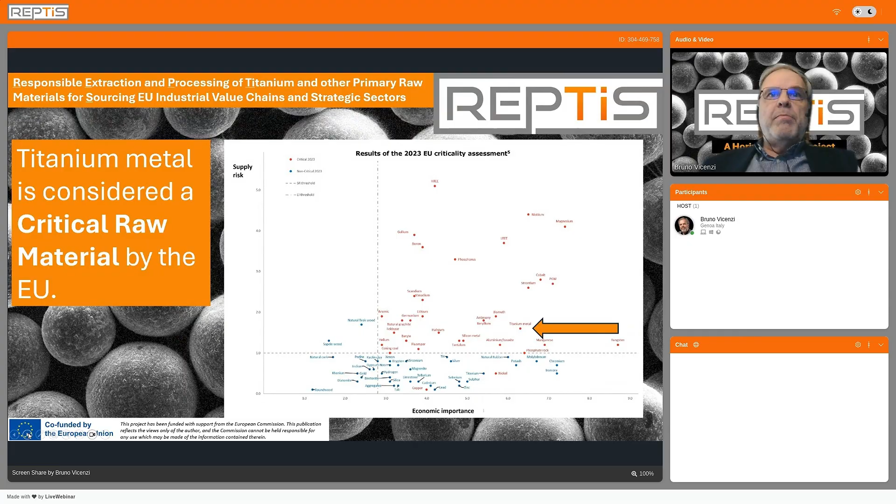And so it is really important for the European Union because there are a lot of products made of titanium that are being produced in Europe. On the other hand, Europe is not a real producer of the raw materials. Practically all of the titanium which is used in the EU, in aerospace, in industrial applications, in defense, which we know is on the growth side now, and medical, is all imported, basically.

There is hardly any usage of ore from European land, due to several reasons. And even when we receive it, we are not actually receiving it as an ore, but already in the sponge state.

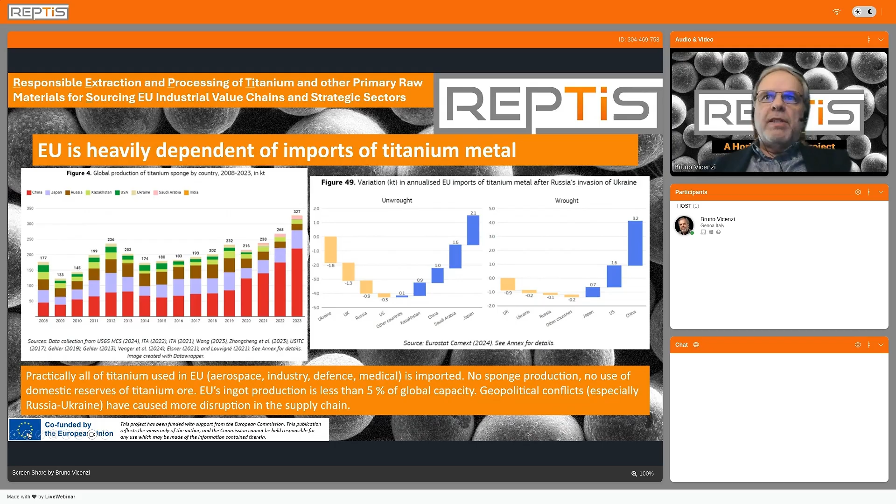So imports from other countries like Kazakhstan, China, Saudi Arabia, and Japan especially, Japan and China in the different situations, have increased, and also the US. So the supply chain for Europe is a bit critical, and this doesn't surprise us. This is, let's say, the y-axis in the critical raw materials chart that we saw in the previous slide. So it's even got worse, as we said.

So the idea was to try to overcome this, and the EU had already started a strategic partnership with Ukraine for many reasons, but also because it's a very important partner in terms of availability of critical raw materials. And so the idea was to respond to the call of the Horizon Europe framework to establish a supply chain from one of these strategic partner countries. The other possibility was Canada. We chose to follow the Ukrainian track and set up a consortium to try to establish a sustainable and energy efficient solution for extraction, processing, and finally sourcing of titanium into the EU.

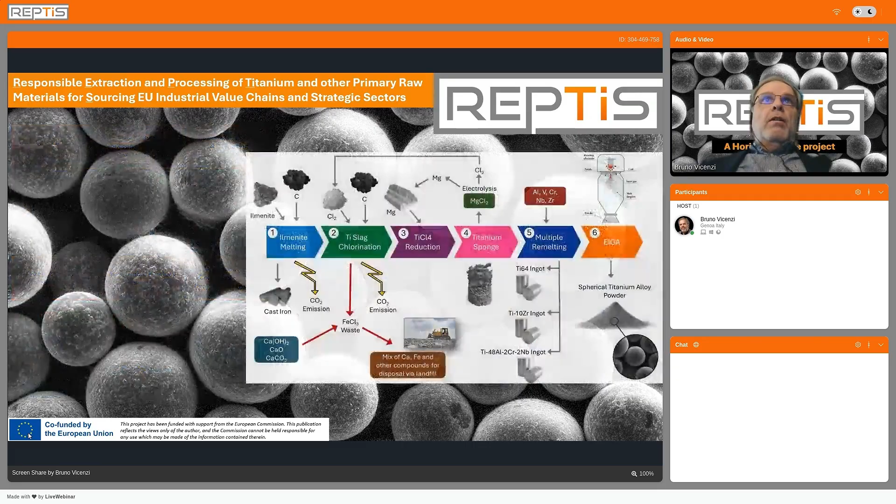So what is the situation at the moment when we're talking about production of titanium powders? And this is a starting point, which is showing many weak points. I mean, there are very established processes. There are also other processes established, and some of these will be shown later in the other lectures.

But in particular, we are talking about the so-called Kroll process that starts from the mineral, and here we have the ilmenite. So there is a melting process. There is a chlorination to separate the titanium, and then this titanium chloride is reduced into a titanium sponge. This is done by reaction with magnesium, so that the chloride is then recycled in the process.

But after that, you have to remelt this sponge of titanium several times to obtain the right composition. Also, you have to add the various alloying elements if you want to produce the different titanium alloys. And then to produce the powders, you have to go through an atomization. And as titanium is very reactive, this is normally done in a process called EIGA, which is electrode induction gas atomization. And this brings finally the spherical titanium alloy powders.

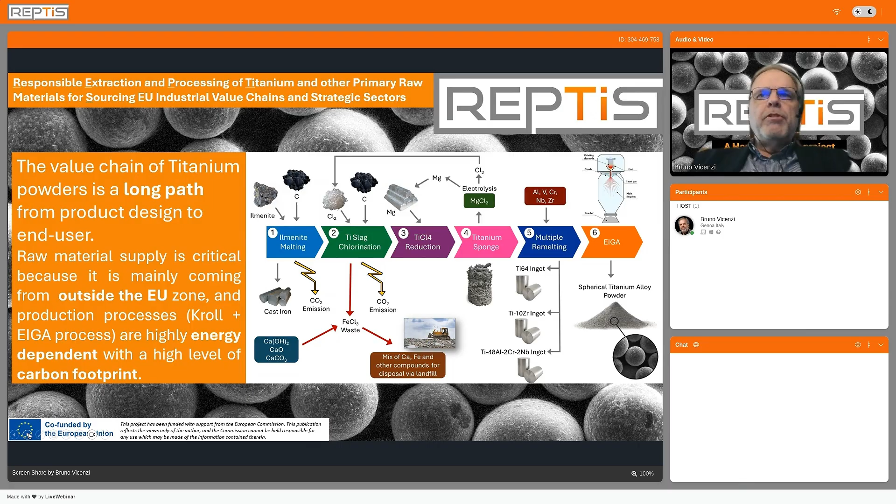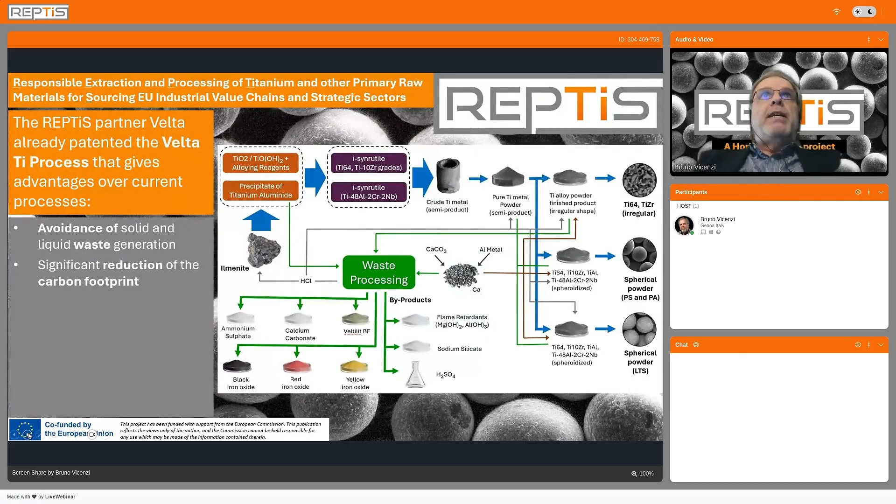And the good starting point for the project was that Velta already developed a process called the Velta titanium process that already has a lot of advantages that you can see on the left, and we will comment. So if you start from the left, from ilmenite, just by chemical processing you can have the separation of the titanium fraction, which is the synthetic rutile, which can then be reduced with similar processes to those used in the Kroll process, also by usage of other stripping metals like magnesium and calcium. And you finally get to the crude titanium metal, the equivalent of a sponge. But this is then just crushed into an irregular powder.

Please note that while processing the titanium ores, they can already be additivated with the other alloying elements, and this leads to the direct formation of the alloy sponge, which is then crushed into the titanium alloy powder directly without having to alloy in the melt. So as you can see, it's already a low temperature process compared to the several meltings in the Kroll process.

And on the other hand, Velta already developed all the valorization of the side streams. So all the waste, which is everything which is not titanium, is either recycled, like for instance the hydrochloric acid, which is reused in the process, or used as other products for several applications. You can see there's pigments, flame retardants, materials that go into construction materials, and also fertilizers, for instance. So actually, it's a zero waste process.

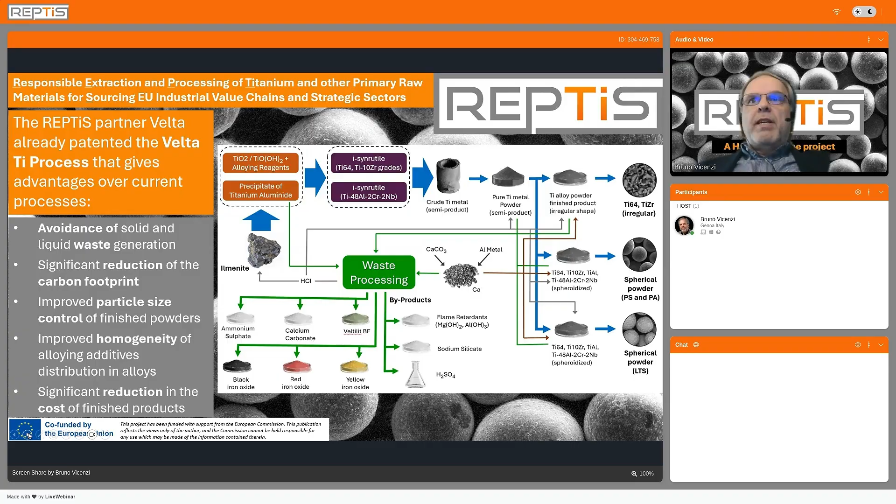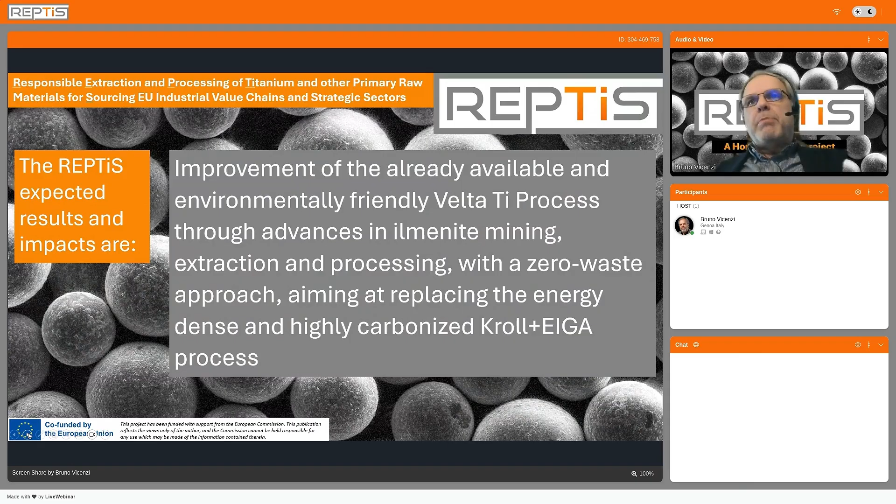Yes, because clearly we need to go from what we already have, which is already available at, let's say, lab scale, at kilogram scale, to a higher amount and achieve TRL 6 or 7 at the end of the project. And we want to demonstrate that this improved process will be able to replace, at least partially, the Kroll-EIGA process.

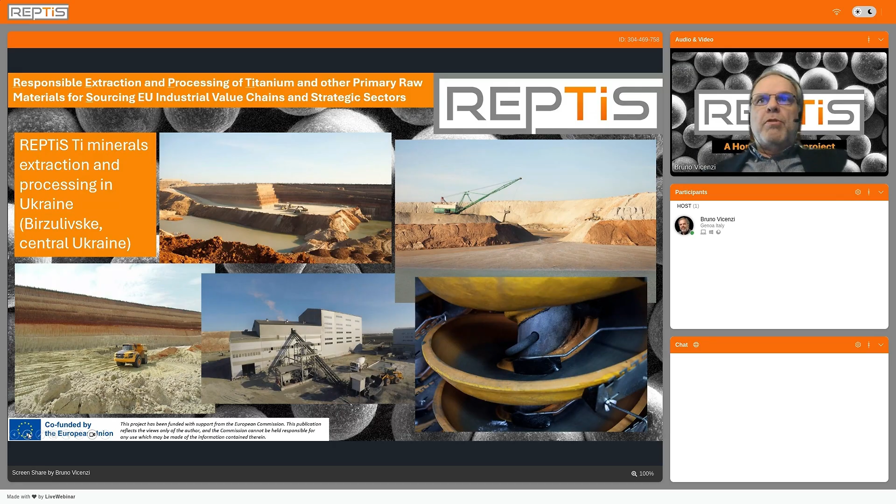And well, all starts from Ukraine, and here you can see some images from Birzulivske. You can see the sands there that are being exploited, and then some of the processing that can be done on site. And then also in Ukraine, there's the facilities that will process the ore into the actual metal powders as shown in the previous chart.

So we plan to build this supply chain from Ukraine, and this will likely be one of the good sources for titanium to be used in powder metallurgy products in Europe with this net zero waste approach and with the sustainable production, and so that producers will be able to claim lower end values of their sustainability indexes by using a more sustainable feedstock.

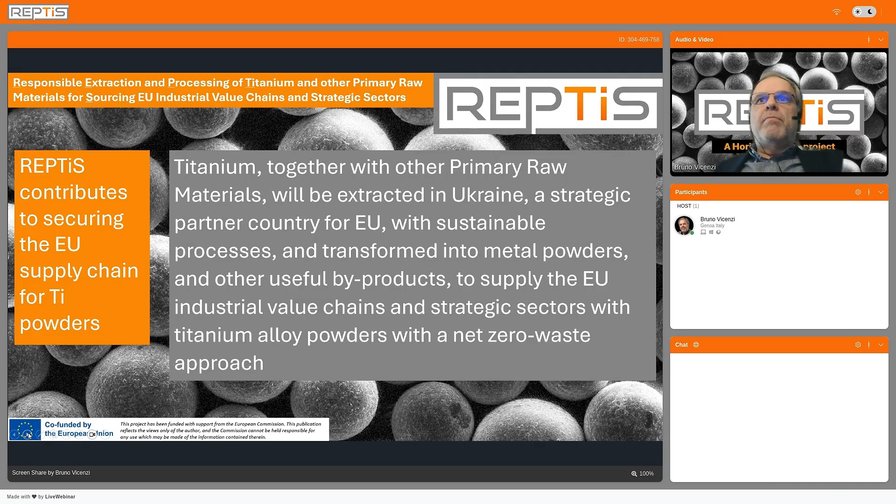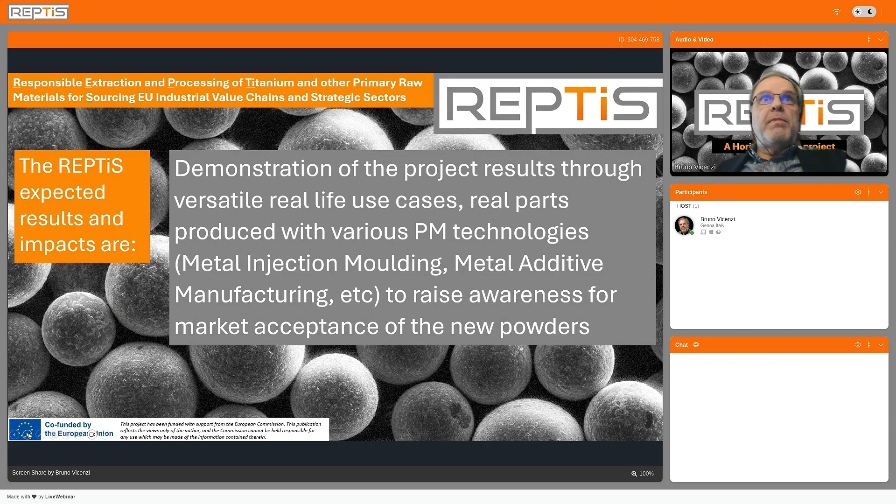We plan to apply the powders in different use cases, and these are coming from different technologies, as I already mentioned: metal injection molding, metal additive manufacturing, and this will be useful to validate the powders and finally raise the awareness for them. And we hope to establish a good market acceptance for the new powders.

Here are some examples. The sectors that we're aiming at are medical, aerospace, consumer goods. You see there some additively manufactured parts. The one on the bottom right is metal injection molded. So we will see all these applications, and we're not planning on doing a full characterization, full validation of these components in the final use. That's beyond the scope of the project, because the product is the powders, but these will be the validation of the powders in a real industrial use.

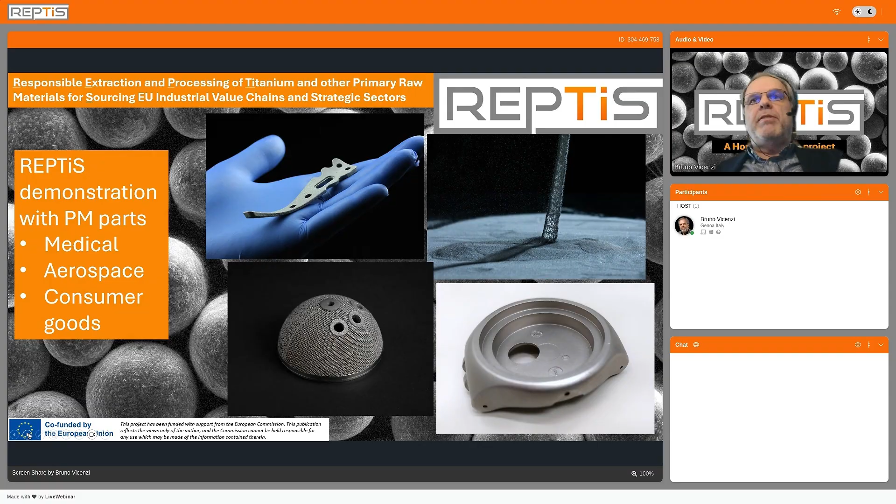Right, so finally, we will also compile LCA datasets for the titanium powders and the products that we'll have, a product environmental footprint study for the 4 case studies.

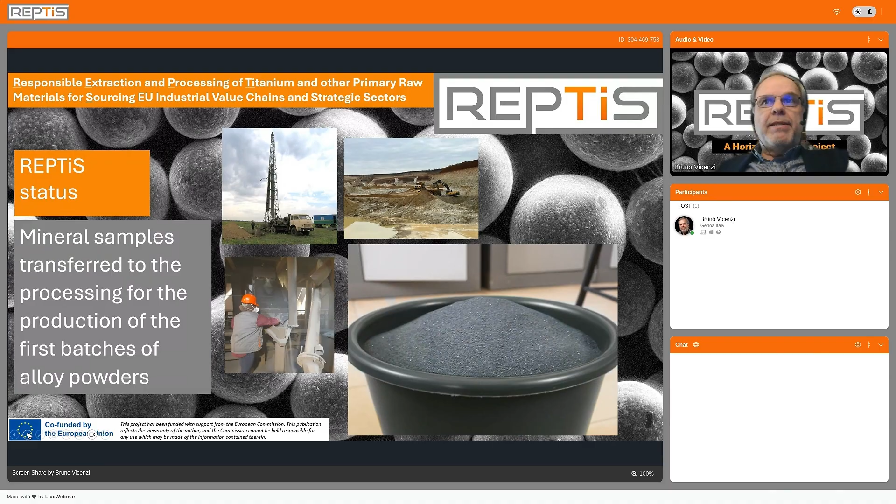And yes, where are we after almost 1 year? I cannot give you details right now, but the work has been focused on the titanium extraction and optimizing that by making it more sustainable with use of green energy, for instance, and optimizing the processing for the concentration into what you can see on the bottom right, which is one of the batches of alloy precursors, let's say, that have been moved from the mine to the processing plant for the production of first batches of alloy powders that are going to be distributed among the consortium right now and undergo the first tests. So we'll keep you informed on what happens.